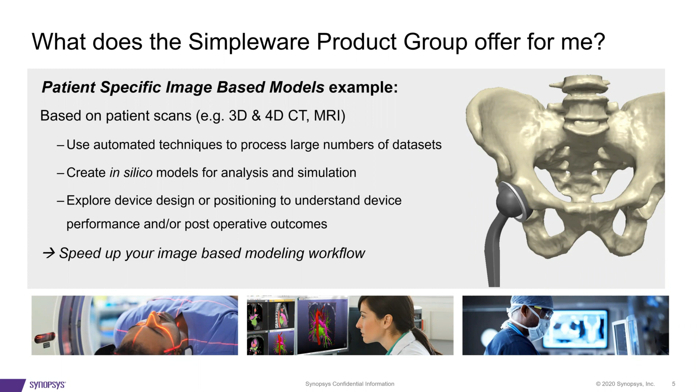One of the main things we're focusing on is giving you tools to help speed up your image-based modeling workflow. There are certain things you want to look for in an image-based modeling software such as this, and some of these things are what we focus on at Simpleware.

We focused on creating software that is both easy to learn and use, and we've worked to make sure it's fast and accurate as well as powerful and reliable. We also understand that as hard as we try, we can't cover every situation, so we focus on making the software customizable through the scripting API, which allows you to customize the software to your particular needs.

While it's not as big an issue for academic customers, one of the things the tools are focused on is reducing time to market for your medical devices. To that end, we also fully support the software through our application engineering team, and the support is equivalent for both commercial and academic customers.

To give you an introduction to the software itself, it's GUI based, providing a large variety of tools for various aspects of the image-based modeling process - whether visualizing your data, including creating animations such as for presentations, we offer the tools for that.

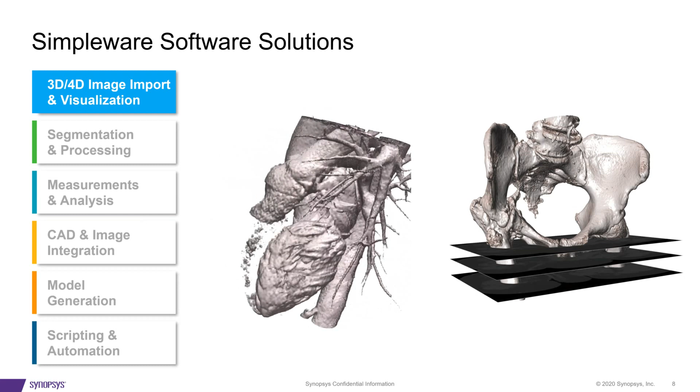The next step is once you bring the images in, that's only half the battle. The next step is your segmentation and processing. This is where you identify the voxels in the image that correspond to various structures. There's a large variety of tools the software provides to allow you to do this, ranging from automated to semi-automated to manual.

The workflow typically needed to do your segmentation largely depends on the image data set you're working with, things like the quality of the images, what you're trying to get out of them, whether there are artifacts, metal or motion artifacts, and so on. So we offer a large number of tools because the workflow you use is going to vary from one data set to another, unless your imaging protocols are very standardized. Then it'll be very similar, but usually there's still a little bit of variation.

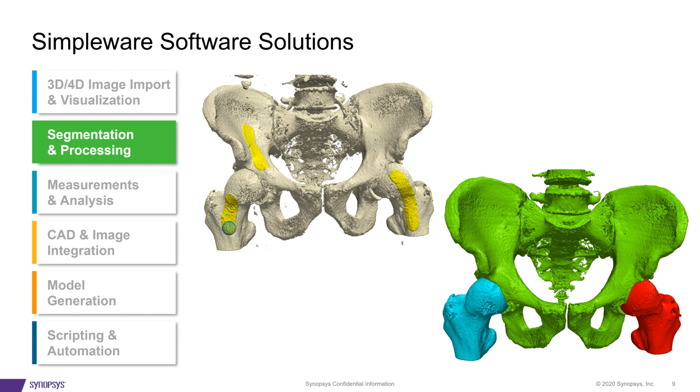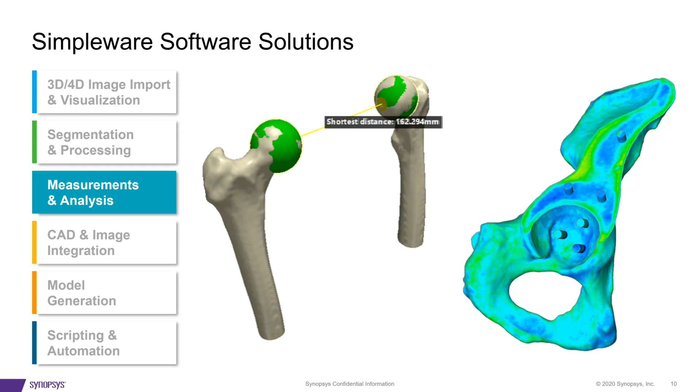Once you get your model out, one of the main things is what do you do with this? There's a lot of tools that allow you to work with your model once it's segmented, including doing measurements and analysis, be it statistics, taking measurements, fitting shapes, basically interrogating your model so you can quantify it and get the measurements you need for your particular application.

Incorporating CAD geometry is often very important, especially for orthopedic applications, where you have your device and want to incorporate it into your image-based model. Typically your image-based model contains your anatomical information, and you may want to incorporate your CAD-based design for your device, bringing it in to create a single model that incorporates both. We do offer the ability to do that.

What's more, we allow you to combine the CAD and image-based data in the same model and do things like mesh the model. So you can mesh the CAD and the image geometry in one model and export it as a single model to an FEA or CFD solver.

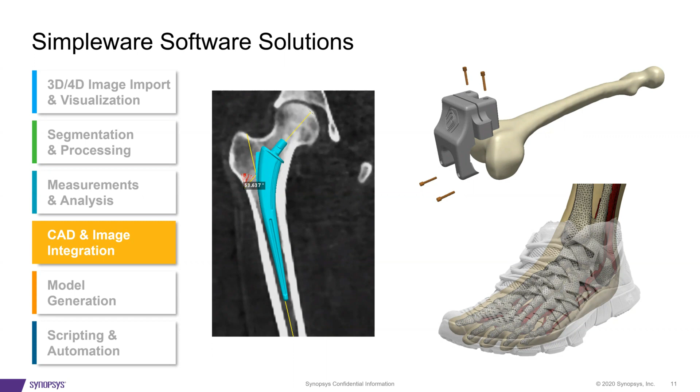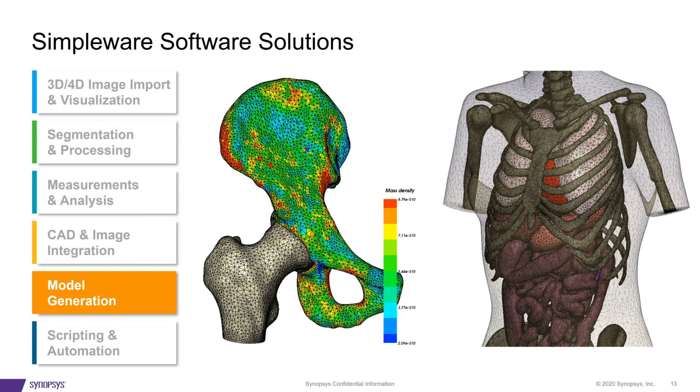This leads nicely into the next part, which is that we offer a wide variety of options for putting your model into a format that's exportable and most useful to you. We can export to most of the major commercial FE and CFD packages in an appropriate format, like ANSYS, Abaqus, COMSOL, etc. We also offer creation of high quality STLs for 3D printing, as well as tools to export your geometry as an IGES or a STEP file, should it be needed.

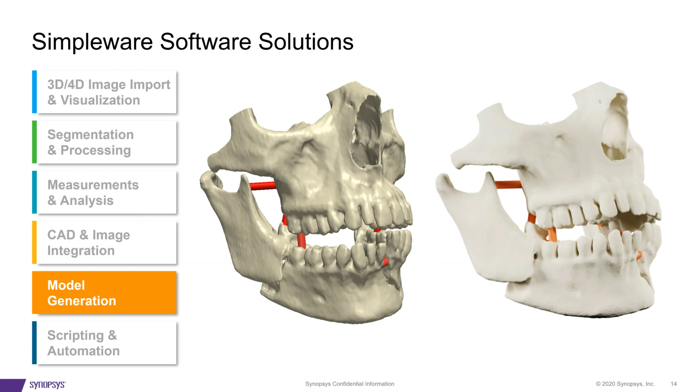Here's another example of model generation. If you want to go to 3D printing, there are tools there, because this is kind of a specialty subset of what you'd do with the model, and there are certain tools you're going to need. We have tools to allow you to create things like connectors, basically to format your model so it can be successfully 3D printed.

Lastly, since we can't necessarily consider every possible scenario when creating the software, we give you the ability to do a lot of scripting, whether through the API where you write your own code, or by recording macros. So if you have a number of data sets and you're doing the same process over and over, just record a macro, then you have your script, modify it, and each time you get to the repetitive stuff, just run the script. Saves you a lot of time.

It also gives you the ability to convert from logs. So when you're doing things, every mouse click is recorded in a log. You can go back, highlight that, and convert it to a script. All of these things are designed to let you customize the software in ways that best fit your particular application

to save you time and make your workflow more automated by allowing you to do things like build plugins for your particular application, with the goal being to give you the ability to create a fully customized solution for your particular workflow.

With that, I'm going to summarize this part of the presentation. The point of this part of the presentation was to present the Simpleware software, what it is, what it can do, and some of the features that are available. And just to sum up, it does give you the ability to create these image-based models using robust proprietary algorithms, best-in-class segmentation tools.

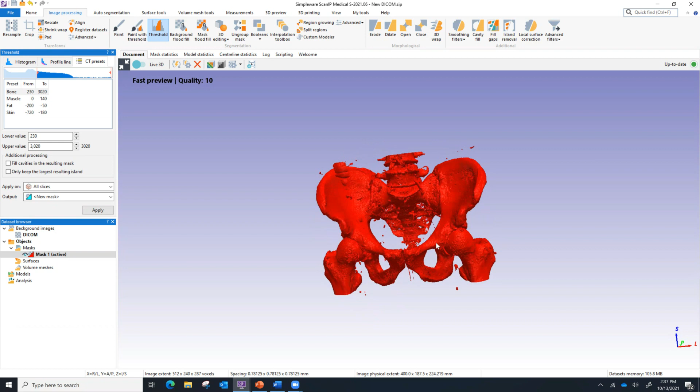So I'll click apply, and you'll see that a new mask has been created. And when I refresh the 3D view, you'll get a feel for basically what was captured by the threshold. So you see we got all the major bones that we're interested in, but we also picked up a lot of other noise and other small structures that had grayscale values that were within that threshold range. So I want to get rid of these.

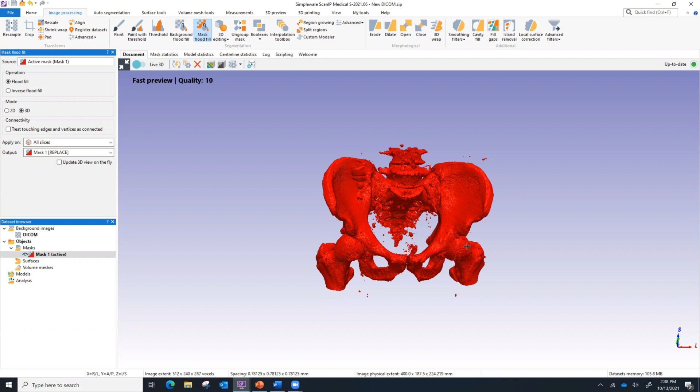And the way I'm going to do that is I'm going to be using basically what we call a mask flood fill tool. What the mask flood fill tool does is it allows you to basically pick an island. In this case, I'm going to pick the island that corresponds to the pelvis. And what it'll do is it'll actually retain that island while getting rid of any disconnected islands that are not attached to the island I picked.

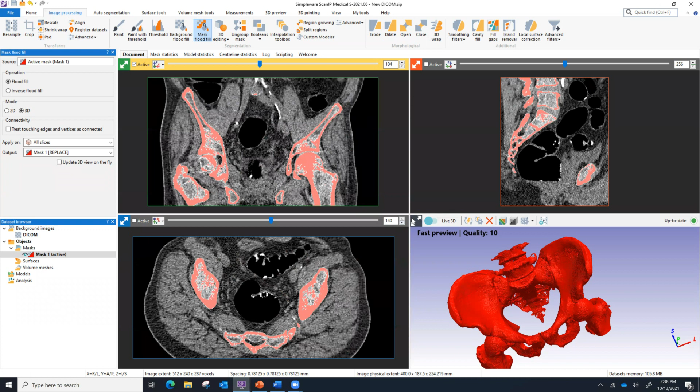So if I zoom in here, click on the pelvis and refresh, you'll see that all the small non-connected islands have disappeared. So I now have a pelvis, and my next step here is kind of depending on what I need to get out of it.

If I just need to work with the pelvis and I want to just create a single model with all the structures in here, maybe just for 3D printing purposes, I don't have to be very precise. I don't have to pick one out. Well, then I could just work with this mask, clean it up, and create something that would be suitable for export to 3D printing. It would just show up as one object, but you would be able to see the femurs, basically more like creating an anatomical model of this.

But in this case, I want to go a step further. So I want to basically split this apart. So I want the femurs to be separate objects.

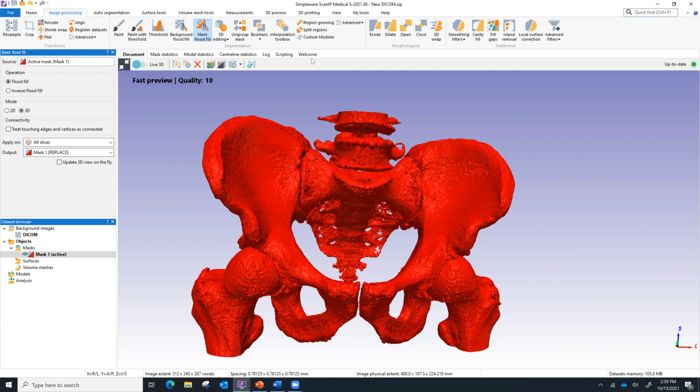I want the ilia to be separate objects, and I want the sacrum to be a separate object. So to do this, I'm going to use a tool we call split regions. What the split region tool does is allow me to create markers or denote structures by creating a submask, or a markers mask, as we call it, to denote each structure.

And then what the software does is it will use the grayscale values and take a look at how I generate those markers masks and will try and work on splitting the island that I'm applying this to into those different properties.

So what I'm going to do is I need to start by creating those markers, and we have created presets for a lot of the cases you're going to see in orthopedics, such as ankle, cervical spine. If you're working in cardiac, we do have the one for the heart, the hip, the knee, the lumbar spine, maxillofacial, shoulder, or thoracic spine. In this case, we're obviously working with hips, so I'm going to do that.

And all this does is it creates placeholder masks, basically asking me which objects I want to segment out of it. So what I'm going to do now is specify hip left, hip right, the sacrum, and femur left and femur right.

In this case, I want to zoom to a slice where I can really see what I'm doing. So I'm going to go to this slice right here because I can really see the ilia of the pelvis. I can see both femoral heads very well. They're very well defined, so I can create a very nice markers mask that will allow you to break this apart.

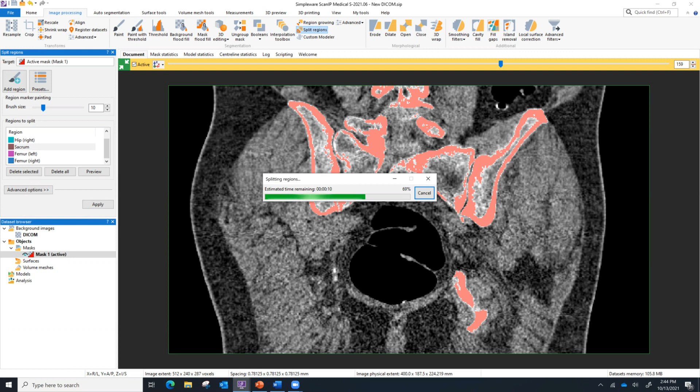This is one of those cases where I'm going to try and use the computer horsepower rather than my own personal horsepower, meaning that I'm going to let the computer do the work. I could segment this all by hand, but it's going to be much faster to do it this way. It's going to take a minute to work through this, but I assure you it will be much faster than if I actually did it by hand.

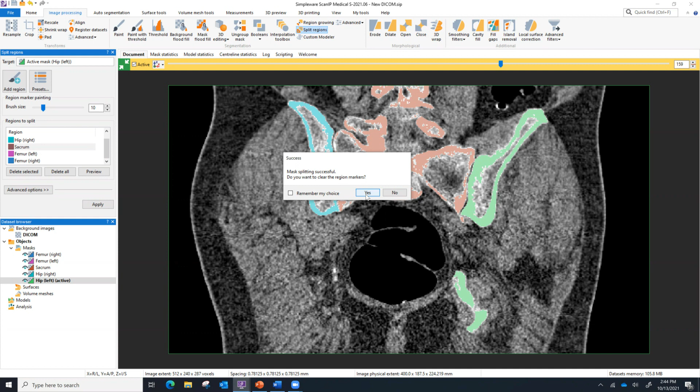So I'm not going to keep the markers mask right now. And we can take a look and see what we've got from the segmentation.

And you can see it's done a very good job of splitting these apart automatically. Now, the one thing here is that, typically for these particular workflows, automated and semi-automated tools can get you a good part of the way to creating your models. But typically all the segmentations and all the workflows ultimately require some manual cleanup to get your objects into a format that you can use for modeling.

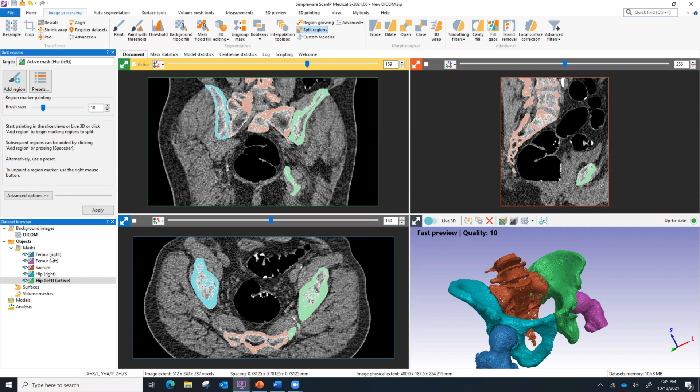I'm not going to do all of these here in the interest of time, but I'm going to show you the basic process for cleaning up some of these data sets. And I want you to keep in mind how long it's going to take me to actually do that on just one, because we have 1, 2, 3, 4, 5 objects here, so you pretty much have to multiply it by 5, maybe more due to the complexity of the sacrum. I'm going to work with the left femur, so I'm going to isolate it. Let's take a look at the left femur and see what we have here.

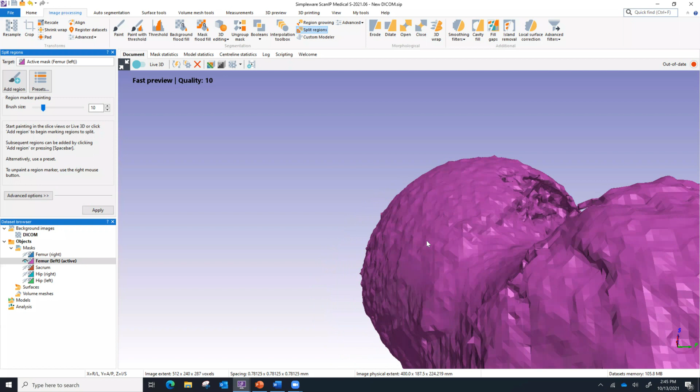So it's not looking too bad, but you see here that the original threshold didn't quite get all of it. So we kind of have to fill this in here. There appears to be a little bit of a hole up here, and it's still looking kind of rough. So I'm going to start working on closing this off and cleaning up the model to put it into a format that would be suitable for modeling. So the first step is I need to close this off. I'm going to use the paint tool, but I'm not going to paint on every slice.

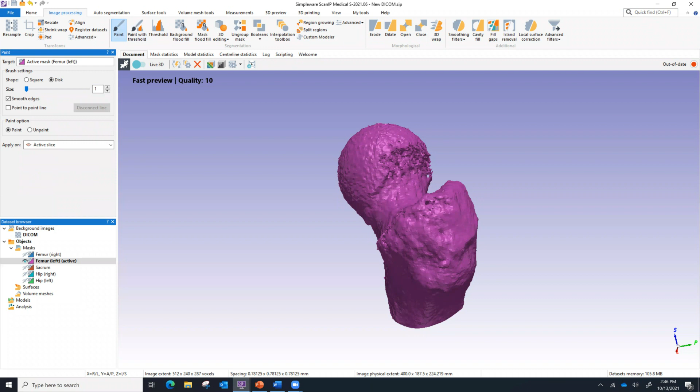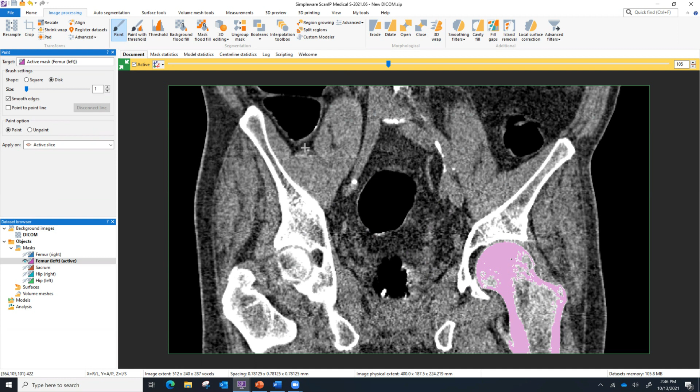So I'm going to find the left femur, and we're going to start right about here. You can start seeing here the parts that the original threshold missed. I'm going to use the paint tool to try and fill those in on this slice, following the grayscale values to fill in those areas that were missed. But I'm not going to do every slice. I'm just going to do every fifth in this case.

And this is one of those things that, as you do more and more segmentations, you start to develop a feel for what needs to be done and how you should apply the tools. In this case, like how many slices you're comfortable with skipping and letting the next step fill in for you. So it does require some experience to learn how to use the software and how best to apply the tools to a given situation.

And I think we need to go just one more for right now, and we'll see what this gets us. Especially when you're doing your first segmentations, it's going to take longer because you're not familiar with it, and as you build up the skills, things get faster and faster. So once I did those 5, let's take a look at what that filled in. You can see how these are going to fill in. I created every 5th one, so now I have something that looks like this.

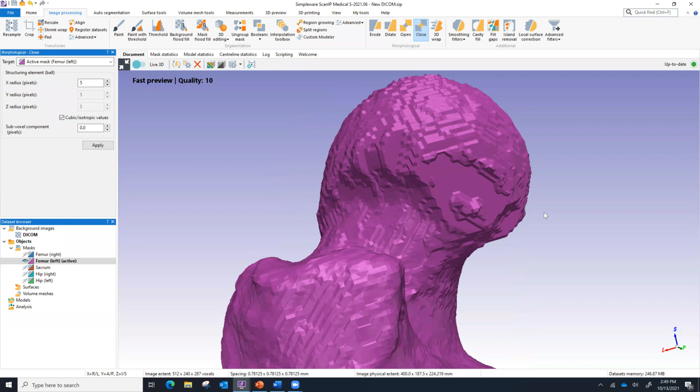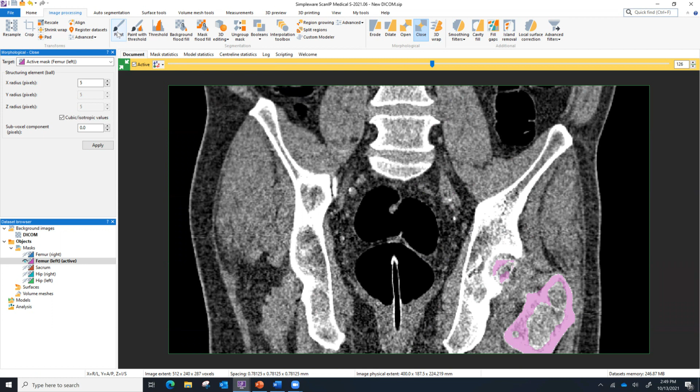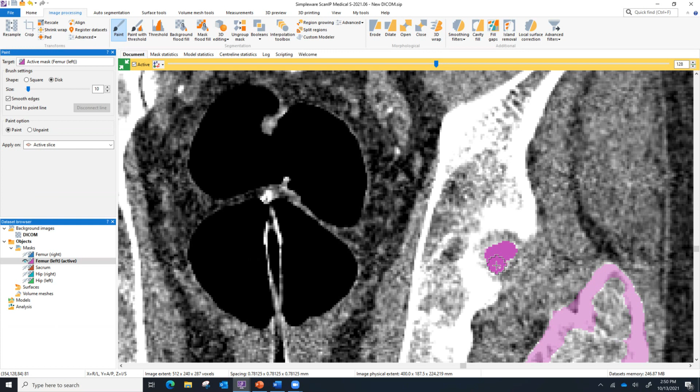To basically fill in this part that was missed. So you can see right there. Now this is looking pretty good, but there still may be some small cavities or things of that nature within the femur itself that I don't necessarily want.

So I'm going to run a cavity fill tool, and what this is going to do is look at any openings in the mask, and if it's completely surrounded by voxels that belong to the femur, it'll basically close those in. So it basically closed in and filled in any holes there.

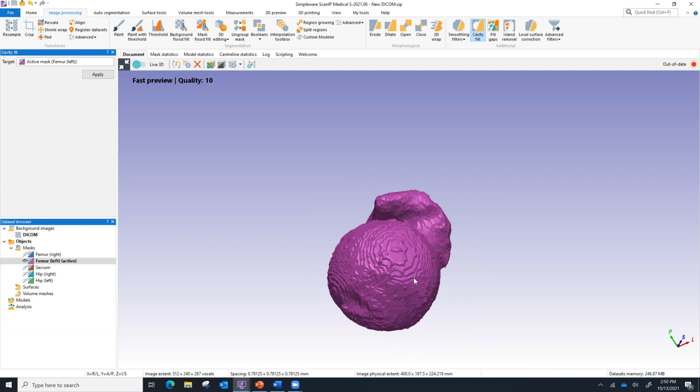So now this is almost ready to go, but you can still see there's some stair stepping due to the fact that these are based on voxels and that it was created from slice data. So to handle that, I want to take it one step further, and I'm going to run the recursive Gaussian filter. And I'm going to binarize it before smoothing, which means that it'll take the mask and assign it all one value, and everything else will be zeros. So it basically creates a binary image before smoothing. This helps with the smoothing process because you don't get partial volume effects.

The other thing to pay attention to is your Gaussian sigma. I'm going to set it at about 1.3 pixels. The higher the value you set here, the stronger the smoothing. The one thing to keep in mind is the more you smooth an object, the more you defeature it. So you start losing little features on it. Now, sometimes that's necessary depending on what your end goal is. But for this case, it's a decent smooth, but it won't be over smooth.

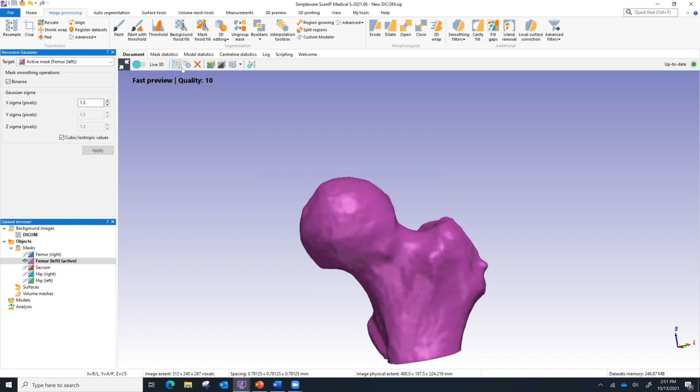So if I click apply, you can see it got rid of the stair stepping while still maintaining the nice shape of the femoral head here, as well as the marrow channel at the bottom. So you can see that this is the process. And then the next step would be to go with the right femur, clean it up in the same manner, clean up the left and right hips or iliacs, and then the sacrum itself. So you can get a feel for that.

And I would estimate that if I did this all, as I would if I was creating it in this method, say I just had a one-off of these, it would probably take me an hour to clean it up totally and get this model ready for the next steps. Now, that's not too bad if I only have a handful of these, maybe 5, 10, it's probably not worth automating the process at that time.

However, if I'm doing, say, 5 to 10 a day or even 5 to 10 a week, say I'm doing work for an in silico trial, or a large number of patients for a specific study, then we may want to look into more of the segmentation tools. And to that end, we have developed automatic segmentation tools for several common anatomies: the ankle, the knee, both CT and MRI, as well as hip CT. There's also one for cardiovascular applications that can automatically segment out the heart.

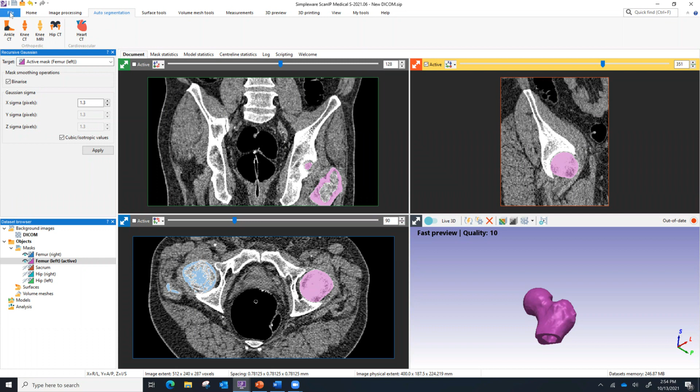The other thing, when using the auto segmenters, is that you have to check what you got out of it. So this isn't a blind process. There does have to be a certain amount of quality control. But the one nice thing with this is, I'm going to close this and open it again, just to show you the process for using the auto segmenters. So we import those DICOM images.

Again, all I would really need to do here is open the auto segmentation, click on the hip, and click apply. I won't do this now. It does the segmentation in about 3 minutes in this case. However, it's 3 minutes of dead space during a webinar where we just watch progress bars go across the screen. So what I'm going to do is show you the output of this.

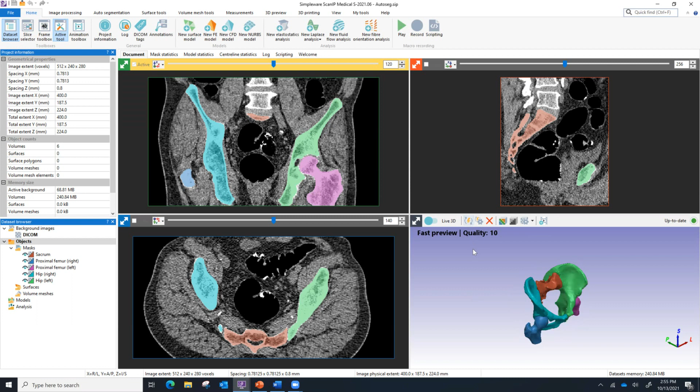So if I hit apply and wait about 3 minutes, you would come back and get something like this, where everything's automatically segmented out into a format like this. So it is a much quicker way to do things, and you can use this for batch processing.

Now, one thing to pay attention to with the auto segmentation tools is that a lot of times, like even in the case of implants, it'll get you something, and it'll usually get you a good ways down the road to creating your model. However, it won't necessarily get you 100% all the time. So typically you would get this out, and it would be a large time saver because now you don't have to go through and work with this.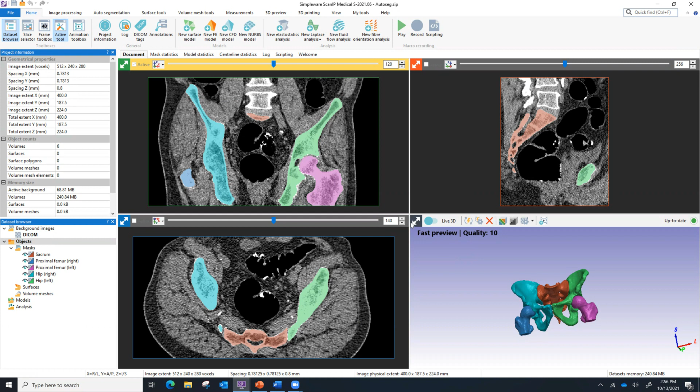In this case, you may have to do a little bit of cleanup on certain aspects of the model. If we look in close, there's a little bit of a connection here we'd probably have to clean up, and maybe deal with this over here, and a couple of other things depending on what you need. This will get you further down the road, but you will ultimately have to do some checking up on it. Especially if you're doing batch processing, you're going to have to do some quality control, to make sure you got out what you think you got out of the auto segmenter.

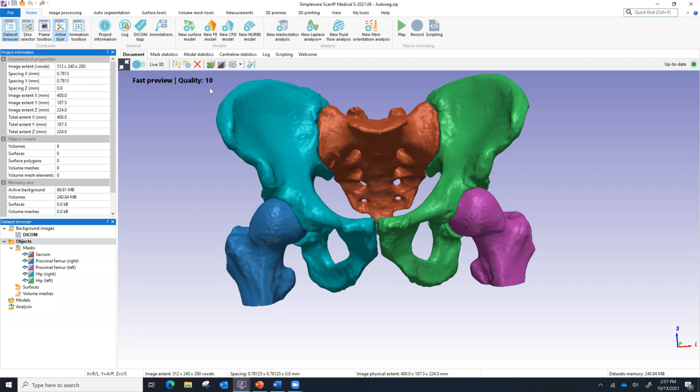So the next step, now that I have my model, is we can try and play around with it and see where we want to go with it. One of the first things a lot of times people want to do with these types of models is just do things like measurements.

So we can do things like just point-to-point measurements, say right here. Basically what you're seeing here are all the landmarks that were generated as part of the auto segmentation. We have designed the auto segmenter to identify the common landmarks for this. Should you need to create your own landmarks, you can generate them by just creating a point, and it'll create another landmark. You can call it whatever you need to. So you can create that point, you can create new ones as you need for your particular model. You can take things like just point-to-point measurements.

As well as doing things like checking angles, as needed. So you can do quite a bit with the measurements as well.

You can also, in some cases, it's important to take a look and maybe fit spheres to the femoral heads or maybe the acetabulum. So that is also possible with the software, and you can use those spheres that you create to do shape-to-shape measurements, as well as basically getting a full understanding of all the dimensions of those particular shapes so that you can quantify the object. So I'm going to show you really quick how that can be done.

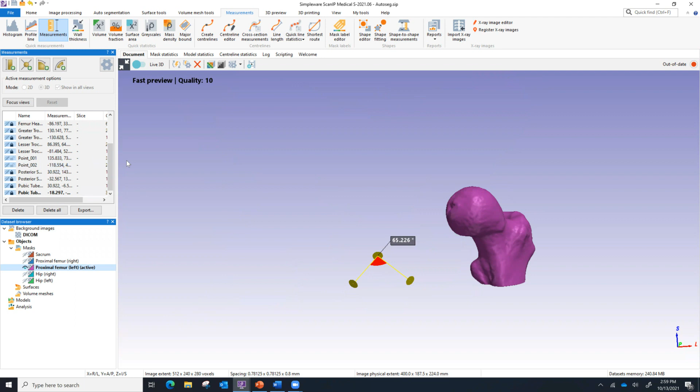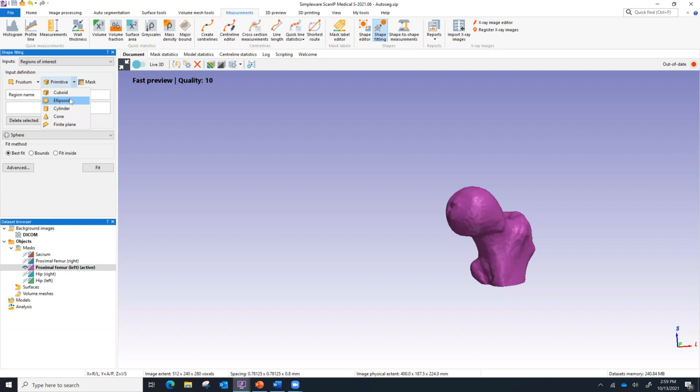I'm going to isolate this femur, and toggle off that angle because we don't need it right now. I'm going to go to shape fitting, and I'm going to basically tell it a region of interest. I'm going to use a primitive in the form of an ellipsoid to identify basically the region of the femoral head, and I can identify this and figure out just exactly what region I would want to fit this to.

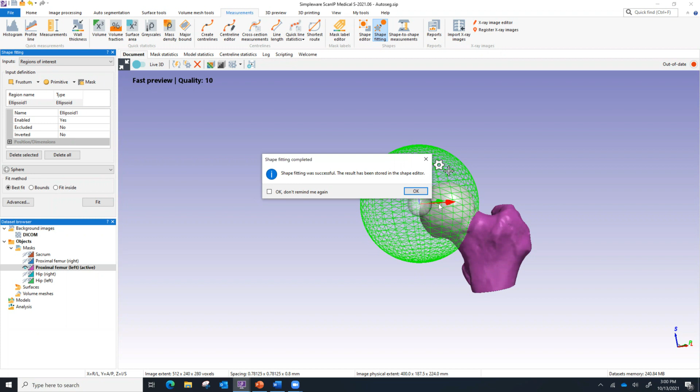I would then use a sphere, and if I click fit, it will basically fit a sphere to that. So let me just delete this, and we would see we basically fit a sphere to the femoral head. I can then look at that sphere and get a feel for basically the parameters of that sphere, such as the radius, the center, the diameter, the area, the volume. So this could be a stand-in for the femoral head should it be needed.

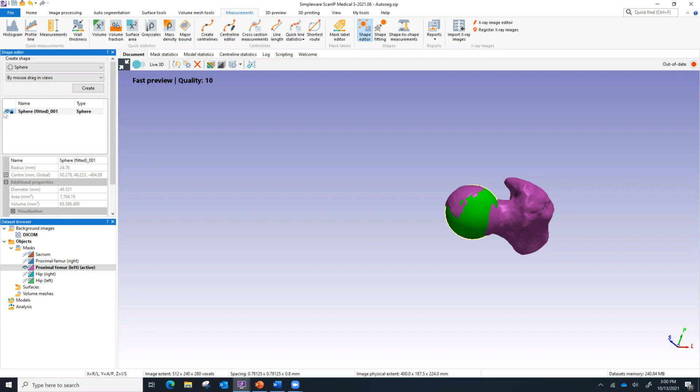And you can do this with a large variety of other objects in here too. You can create another sphere for the other femoral head and then use shape-to-shape measurements to basically measure the distance between them. So that's one option here. But ultimately, in a lot of cases, you want to go beyond just creating a model in the image-based space, and take it to other software packages for further simulation as needed. So one of the things I'm going to demonstrate now is for the models, how we can go to a model.

So in this case, I may want to go take this to FE. I can select this, pull it into the model, and then I can set up the model to create an FE mesh of this.

We can export into a large number of different formats for most of the commercial FE analysis software packages out there. I can also change the model type to surface, should I need to go to 3D printing, or create NURBS if I want to go to CAD geometry as well.

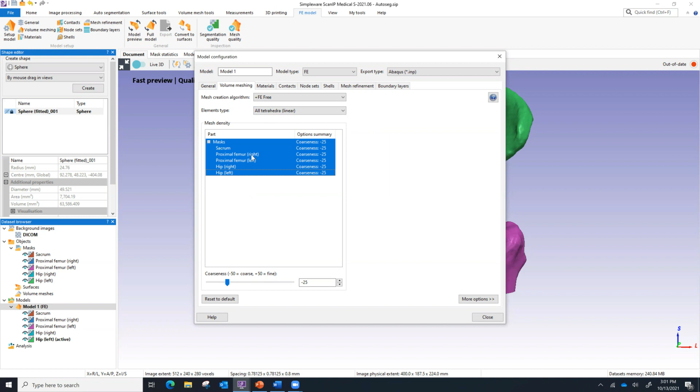But for this case, I'm just going to use FE to give you an idea of what can be done as far as creating these models. You can make these models as complex or as simplified as possible with regards to mesh. You can set different meshing parameters for each object in the model, and you have full control over the meshing, so you can specify the element size and how quickly it grows.

One thing to note though, if you are creating meshes, you will be creating what are known as orphan meshes. So you will need to do things like create contacts in the software - contact surfaces to identify objects that are in contact with one another, as well as create node sets. Creating these node sets would allow you to specify the nodes within a given region that could then be used for setting loads or boundary conditions.

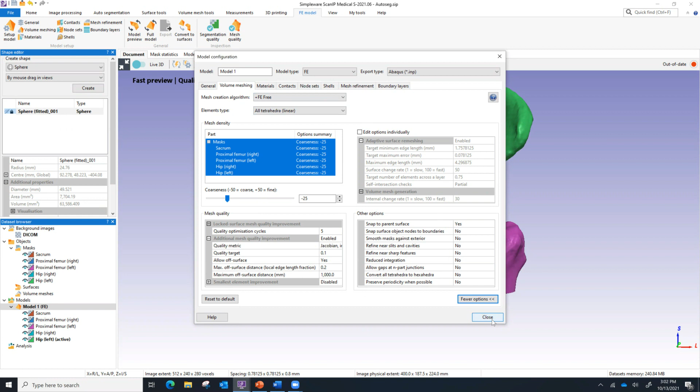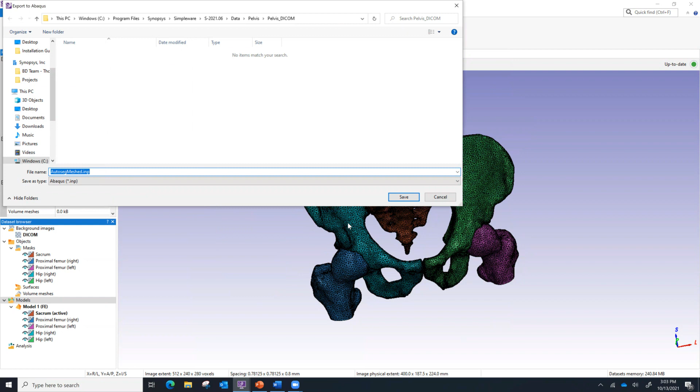So if I were to set this up and actually run it, the next step would be to run the full model. In the interest of time, I'll just pull up the completed object. This will take a few minutes, but you can see it is possible to generate a mesh out of this and then export it as needed to the appropriate folder in the appropriate format. In this case, if we're going to Abaqus, it would export it as a .inp file and allow you to export it to Abaqus. That's pretty much everything I wanted to show.

We do also have the ability to import STLs and place those as needed, but that will have to be the subject for another time because we are running out of time for this webinar. So I'm going to wrap things up there.